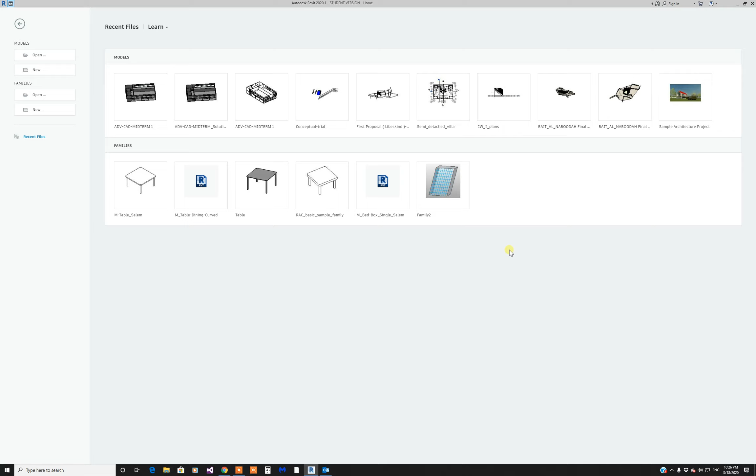Hello everybody, in this video I will create a very basic media storage as a family in Revit 2020.

So let's start. I'll go to File, create a new family, and I'm selecting the metric furniture, which comes with two reference plane presets.

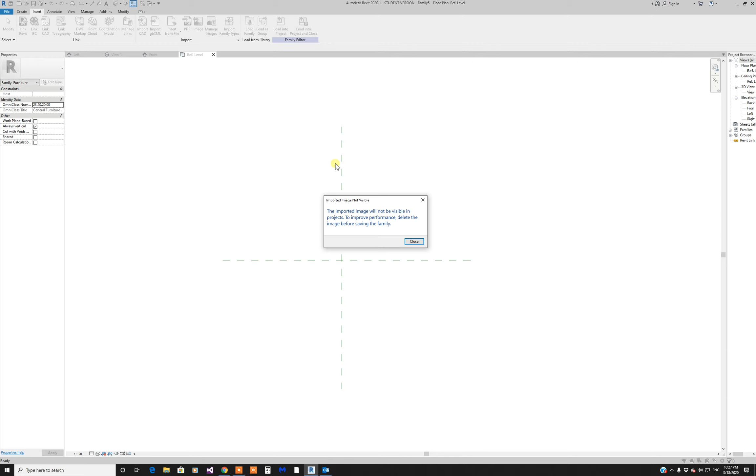I'm gonna bring a picture of my media storage that I'll use, something I just downloaded from the internet, and keep it here for dimensions so I know what they are. This is for the top dimension. I don't have all dimensions, so I'll estimate some of these.

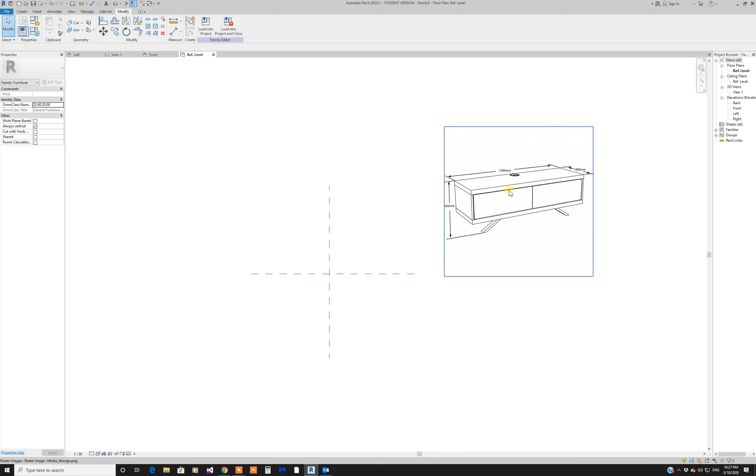Now I'll create the top reference plane, then go for the heights. I'll start my reference plane, first creating 400 milli, keeping the center—this is very important, this is the center of your family, so don't mess with this one. I'll offset this 200 milli.

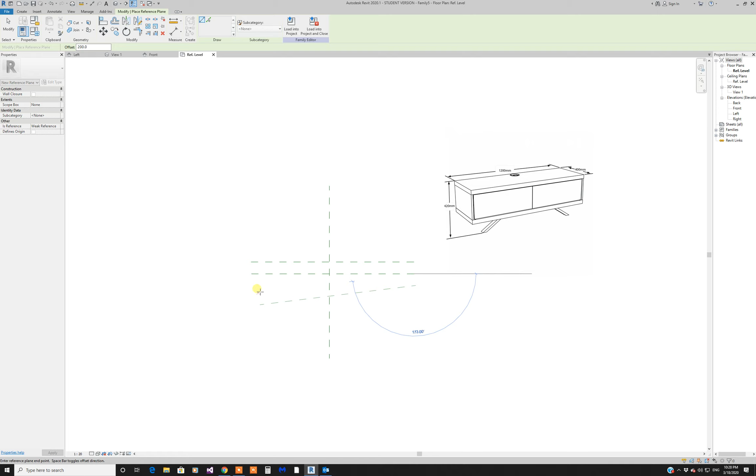I've set this one to 200, which gives me 400, and I'll create another offset of 600, and the other side 600. Now if I look at the dimensions, I have 1200 and 400, which are those two dimensions.

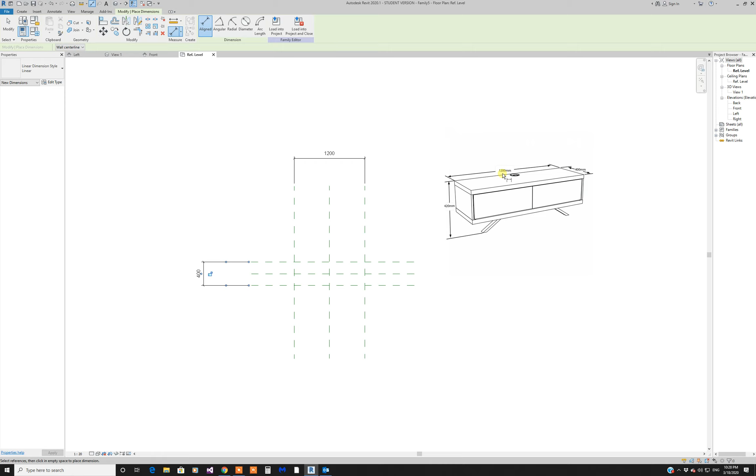Now before I do anything, let me fix the height. I'm gonna bring the same picture again, same image. It's a bit huge, so I'll reduce the size and bring it here just for reference.

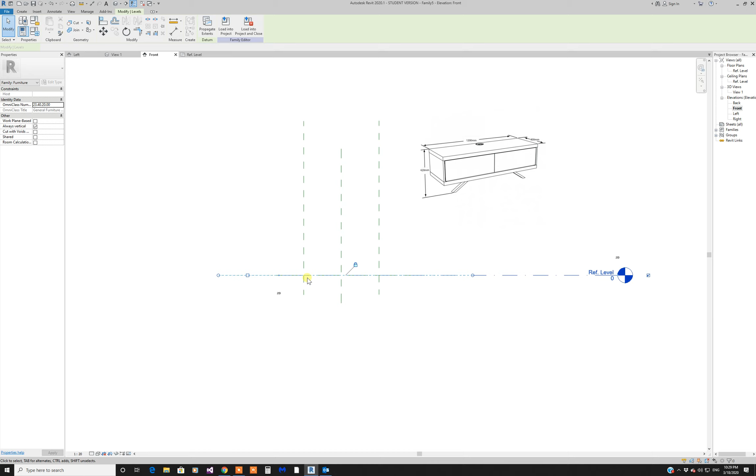Also, I'd like to move this level away so it doesn't get mixed up with the reference plane, since they sit on top of each other. So I'll move it here—much better. The height here overall is...

420 millimeters, so I'll create a reference plane to give me the highest point, with an offset of 420. So this is the highest I could go.

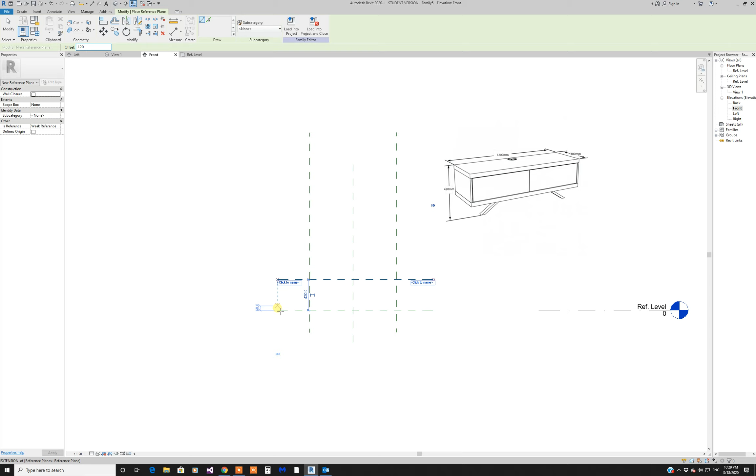Now I will estimate this about 120, so the height of the legs—I could name those, but I'll just leave it as is. I just want to make it as simple and easy as possible.

Okay, now let's start designing. I'll go to the top level and create the first top part through extrusion. I'll use the rectangle—it's already rectangle—and follow these reference planes. I'll estimate the height is about 50, so I'll say depth is minus 50 because I don't want to go above that 420 height.

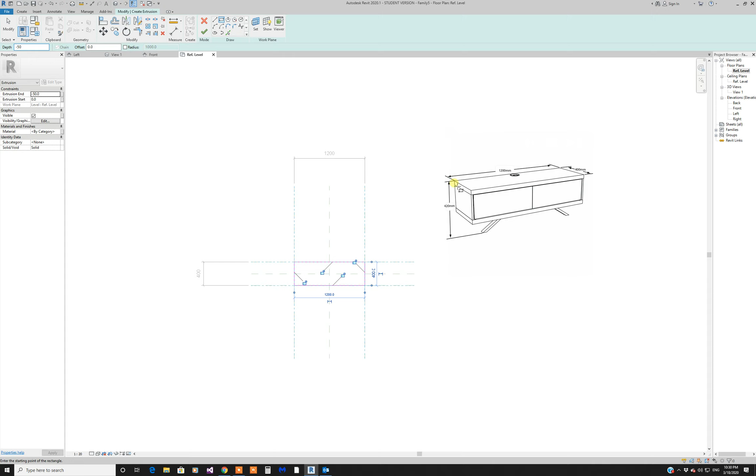I'll drop it down. I'm drafting here, so it should drop. I'm not really sure, I could be on the bottom, but it's okay as long as I drop it minus 50. Done. If I look at the front, yeah, I thought it's great here.

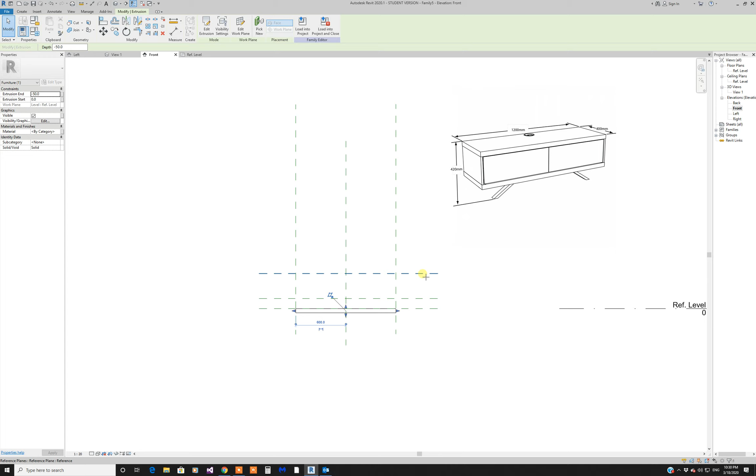So now I'm just gonna change the reference plane for the top one. Edit work plane, pick one. If I had given it a name, I could just pick it from here, but let me just pick it manually—I'll pick this one and come straight to this reference plane.

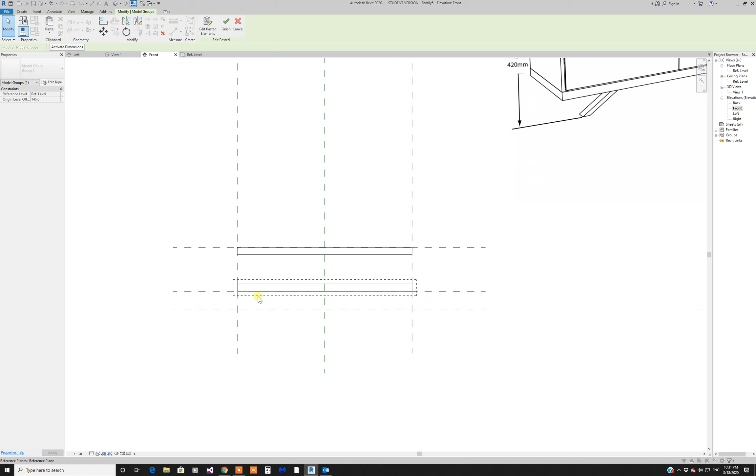Now I'll just copy this since I have this one, copy to the clipboard and paste it here. Now the thickness came higher, which is okay—this is actually what I want. I could bring it down, but this is good enough for me.

Now I'll go create the legs, about in the middle here. I'll go again to the front and create my legs. This time I'll use the sweep command to create my path. First I'm not selecting—I'm gonna sketch the path, about here. Just eyeball this thing, maybe here.

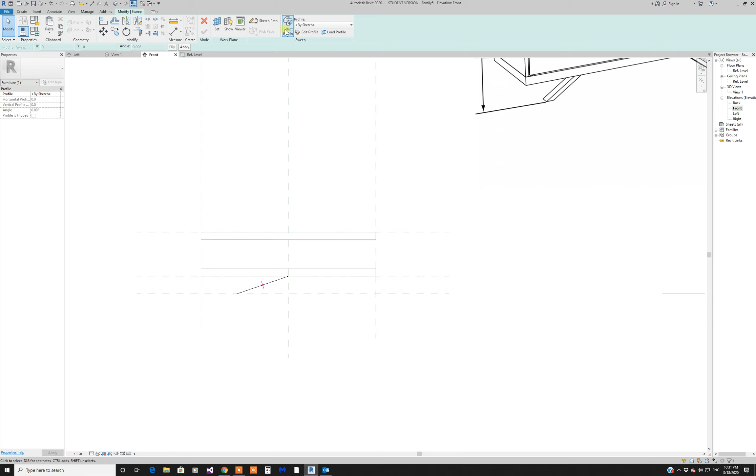Now the second thing asks for a profile. If you have a profile you could select it, but I'm just gonna create one—I'll go to the left to create a profile, a rectangle, about 50 as well, using this rectangular tool.

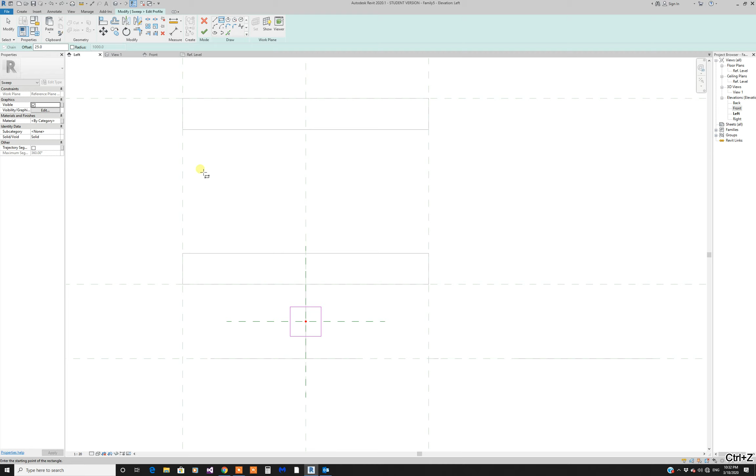It's a bit thick, so maybe I'll change this to 30 or 25, and this 25—but now it's not in the middle anymore. I'll just do it again, making it 25 all around. Okay, this may be okay.

Now the height—okay, no, not yet, I'm not finished, so let me extrude first and then we'll deal with it. Let me show you in 3D.

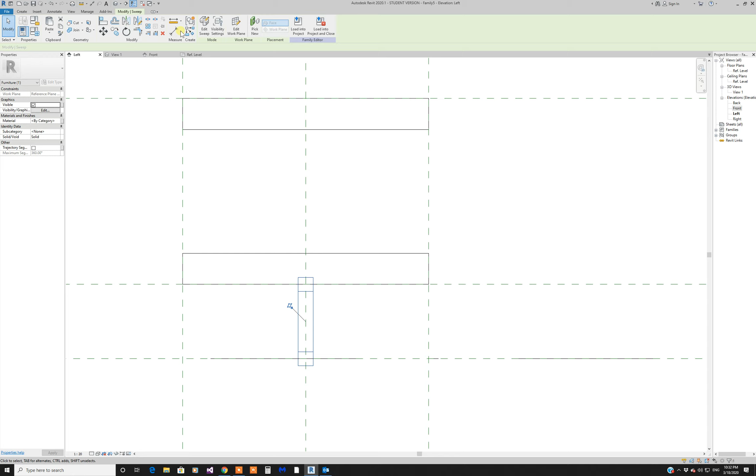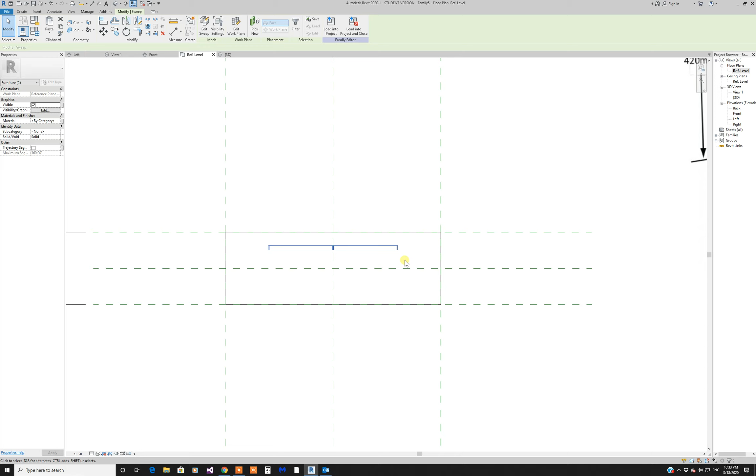One leg is created, but let me check the location—it's right in the middle. I need to create 4 of these, not 2, so I'll move this by some distance and mirror it according to this reference, then mirror those 2 along this reference. Now I have my legs created like that.

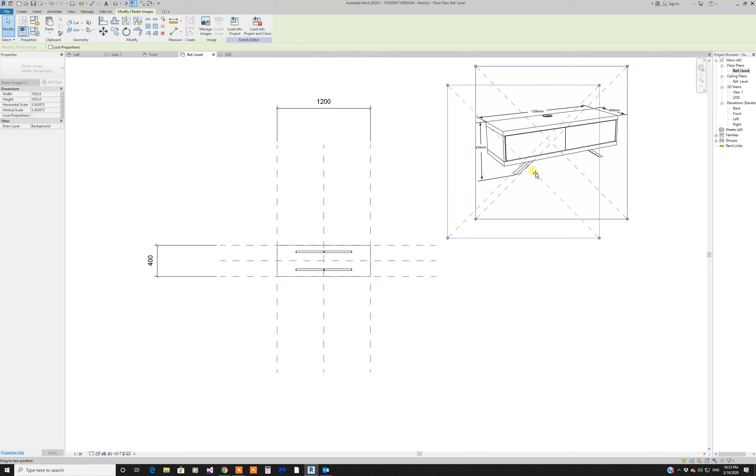Okay, so I'll make the sides—I have the side, what is that thing—so I'll make the side ones which are here, these side boards. Very easy, I'll use the extrude again.

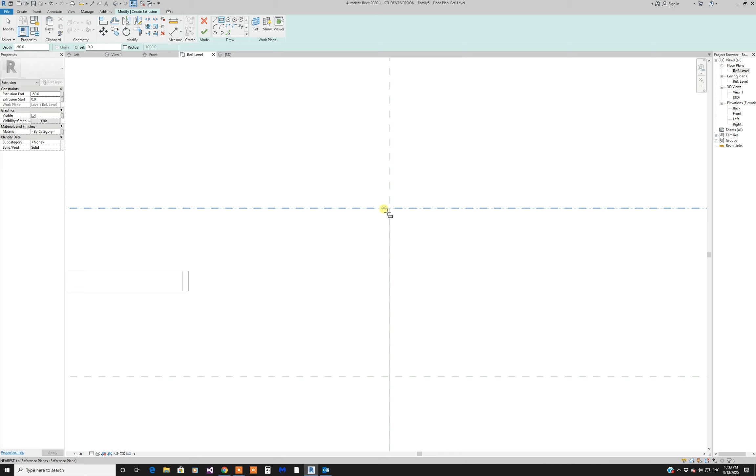Don't worry about getting the exact location and height because you could fix it later. I'll use a rectangular, track it a little bit here, just keep it far away, and it's about 18, about 20.

Okay, I've selected all, now I'll mirror this one along this reference. So I did not check the heights and everything, but it's very easy.

I'll go to the front. They are here now, so I'll just have to change the reference plane. Both are selected, so edit work plane, pick one, which is this one.

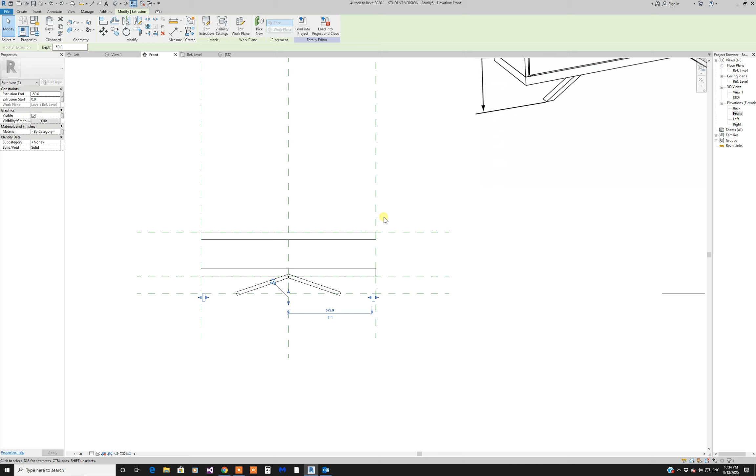Well, maybe I'll do something else—Control Z, and I'll select those and align. I'll use the align command, align those. Okay... no, it's not working for me, so I'm just gonna change the work plane, pick one.

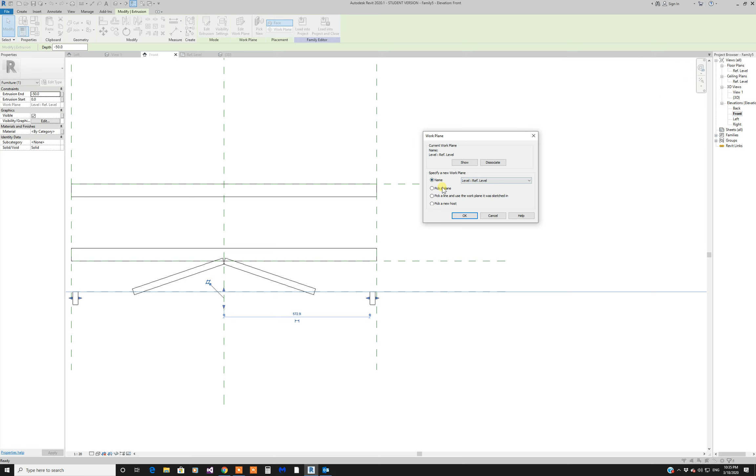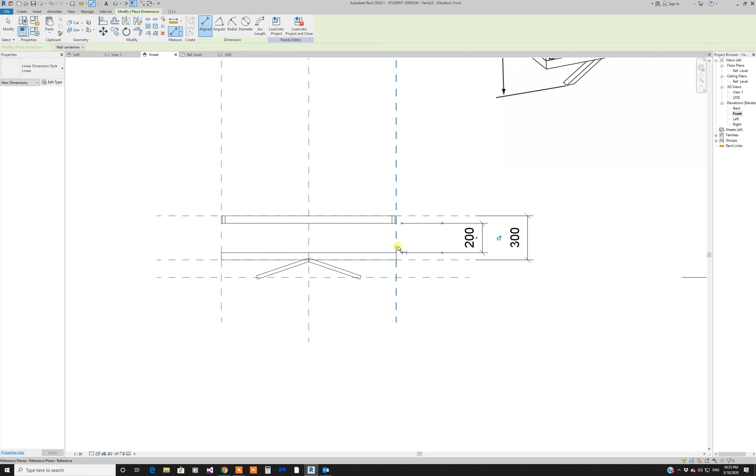Now they should not—the height should be 300, so the height will be 200. Instead of minus 50, I'll say minus 200. And can I say move now?

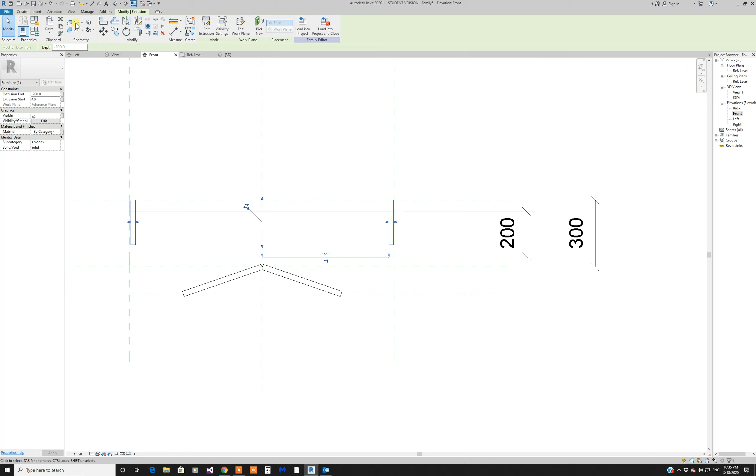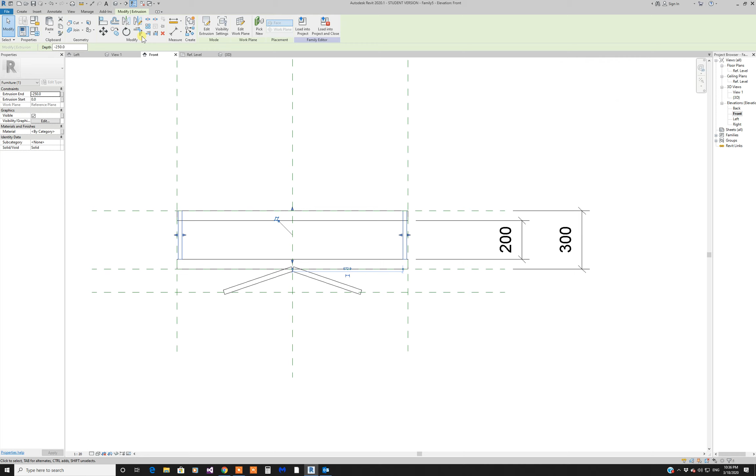Move from here to here. Still not working. Let me try align. But I'm still not happy with this. Let me try align again. Okay, this is better, I locked them here. Took me some time, but this is what I got now.

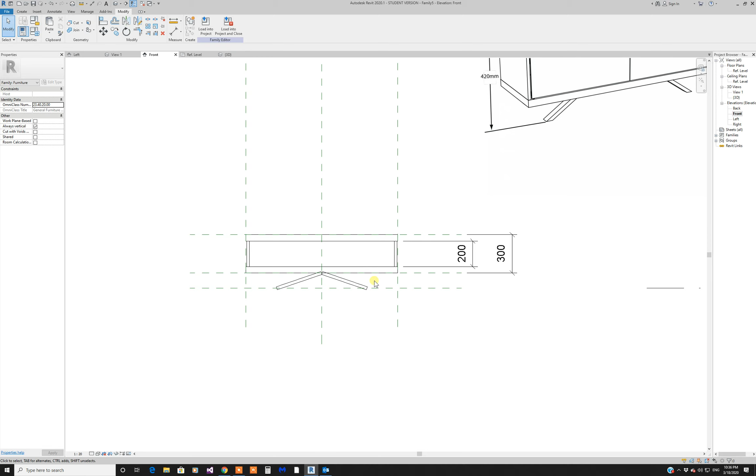Now I need to create one in the back. How does it look in the back? If I go to the front, the front is 2 pieces, the back is 1 piece. So I'm gonna go to the front, it's very easy.

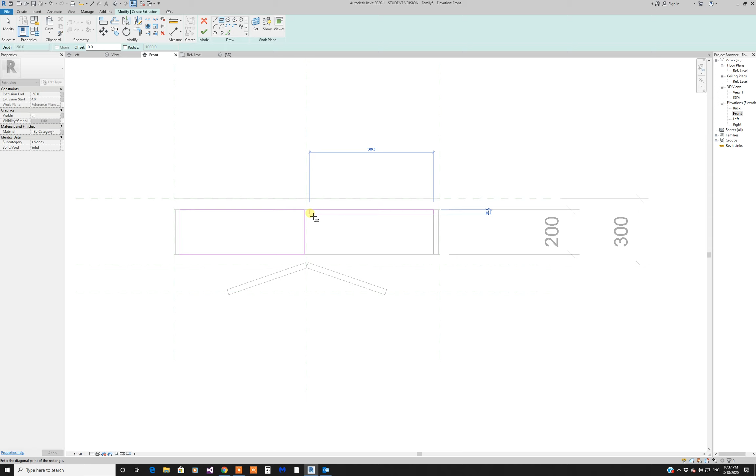I'll make an extrusion again, rectangular, and create one here. Just make a little bit and create another one. About here. There's a huge gap here.

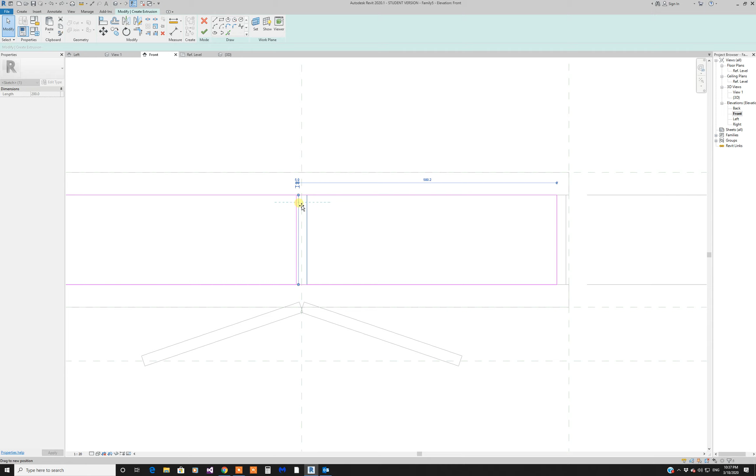If I reduce this to 12, or not 12, I'm just gonna move it a little bit. I want to make a little bit of gap between those, but not a huge one, just a little one, as you can see in the pictures.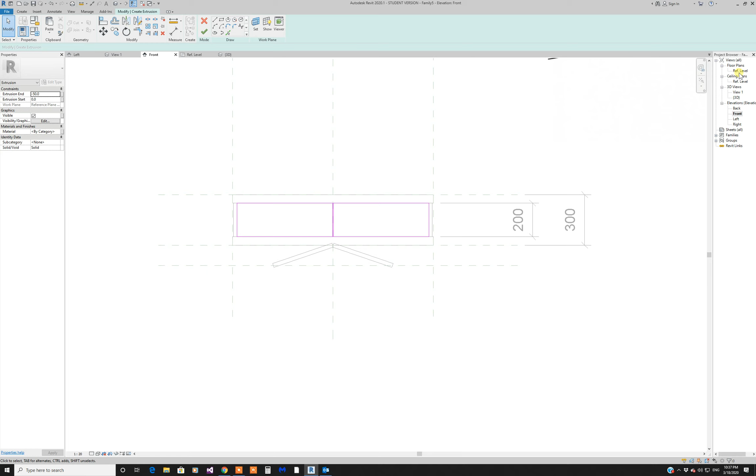Now the extrusion says -50, mine is coming from the center. If I look here, it's from here, so how much should the extrusion be? I'll make it -20. Okay, it's -20.

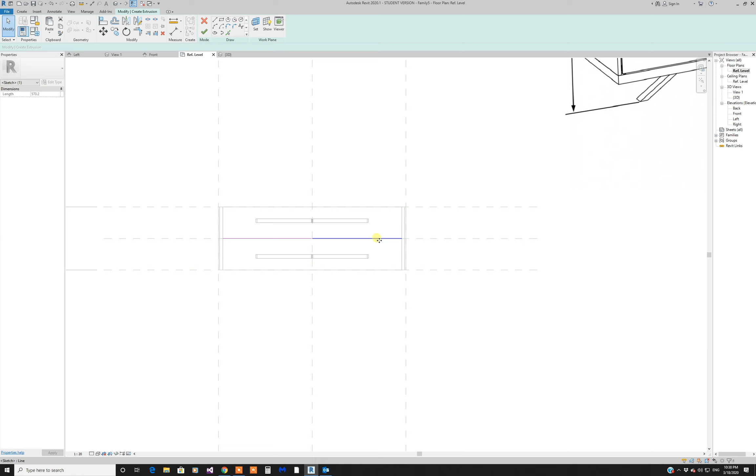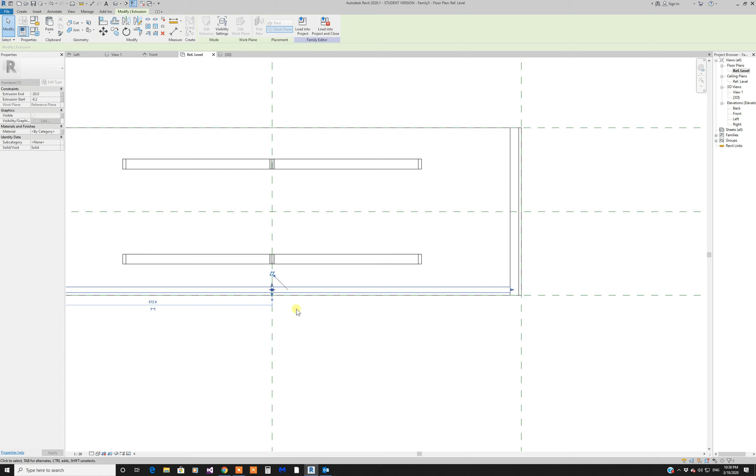Now I will change the work plane, pick new. Okay, now it's here. I could even just make it a little bit like this. And now in 3D, you see that.

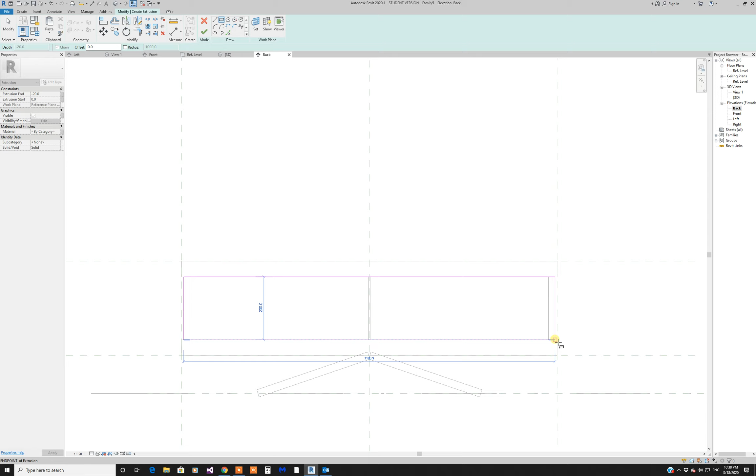The back one is the same, so I'm gonna go to the back. Front, back, and I'll just create one piece. Create extrusion, rectangular, and maybe I'll just cover the whole thing for the back, up to here. Align this line with this one, and the extrusion -20 is okay.

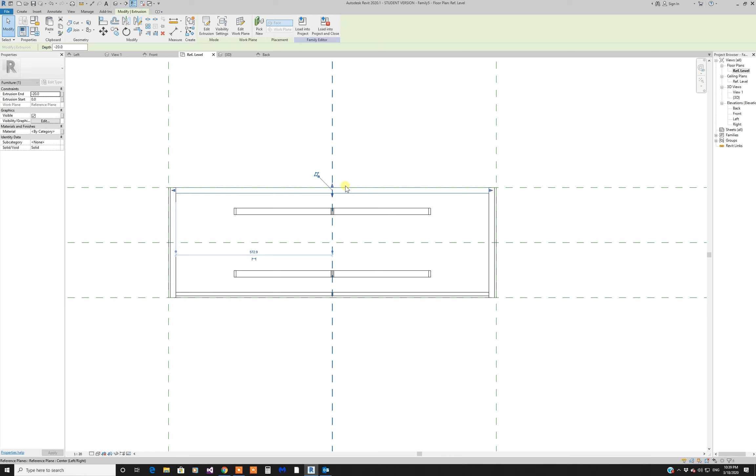So if I come here, I'll just prove it, and then change the reference plane. Edit work plane, pick, okay, and for me this is done. Okay, so this is done.

Now the next thing I want to do is add some materials. I'm gonna go to the parameters, family type, and add another parameter. This time I'll call it, make sure you select material type, and I'll say it's the main material, maybe box material, for the whole box. The next one I'll call the side material, and again I have to set the type as material. I'll add another one for the legs, legs material, and make sure you change the type to material.

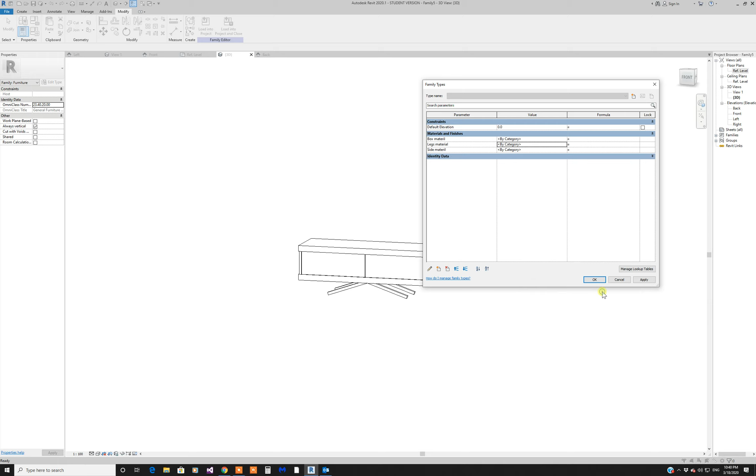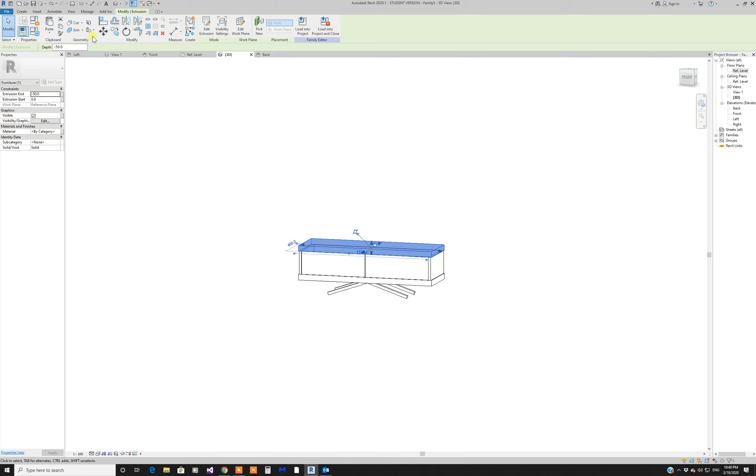Now you need to assign those materials, we cannot go without assignment. But let me link those, join them together. So I'm gonna join this, control this. Okay, so this may be used for one material, these are joined now, and I will join the legs as well so they become one material. So join.

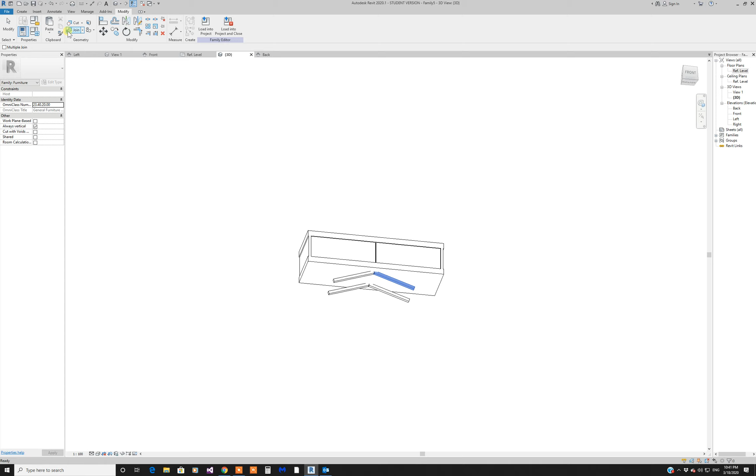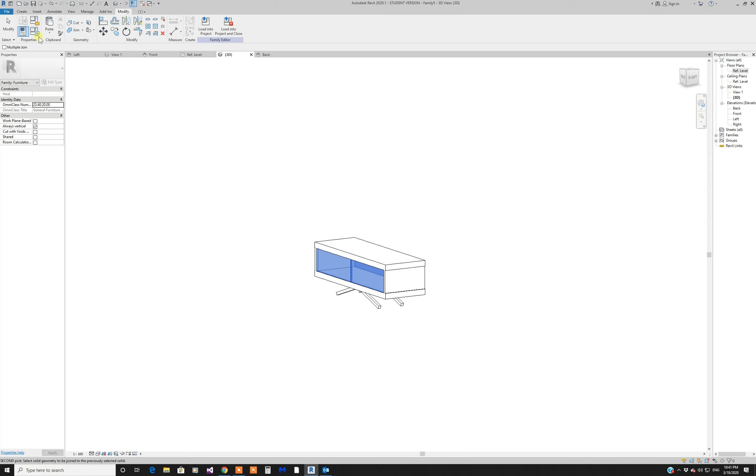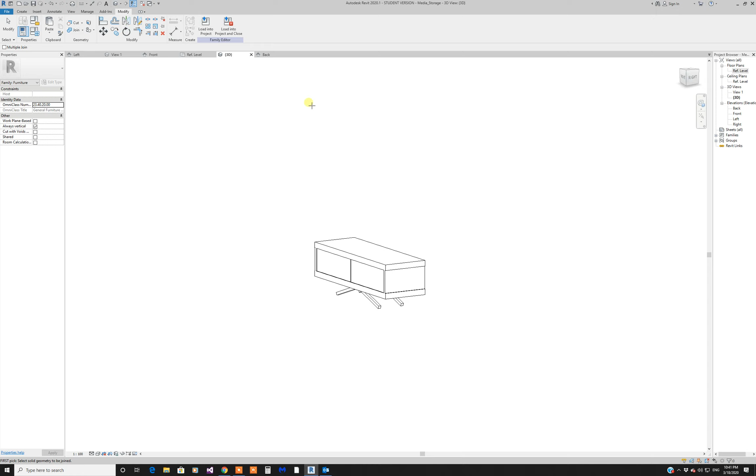2, 3, 4. Okay, so these become one, and the front, or I call it the side, I don't know why I said this, it's already joined. Join with this one, is it already selected? So now they're joined, they should have the same material. And I forgot something else, I'll have to save as family, and I'll call it media storage. Okay, my option, okay, save.

So once we created the material parameters, as I showed you, we have 3 different materials. Maybe I select different materials now or later, and use this birch for the box, and for the side, which is actually the front. These are the legs, so I'm just gonna use any black material, anything that has black.

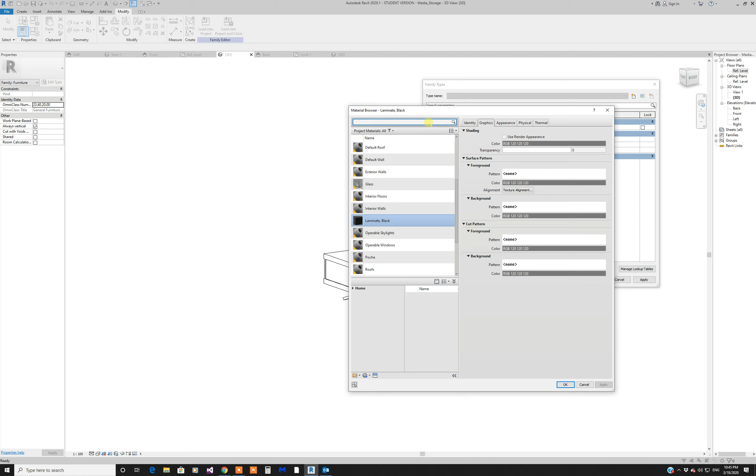Laminate, black. Okay, and for the side we do something white, ash. Okay, ash is good enough. But now this isn't gonna work until I start selecting, because these are groups, so I don't have to select both of them, I hope. And then do not select materials.

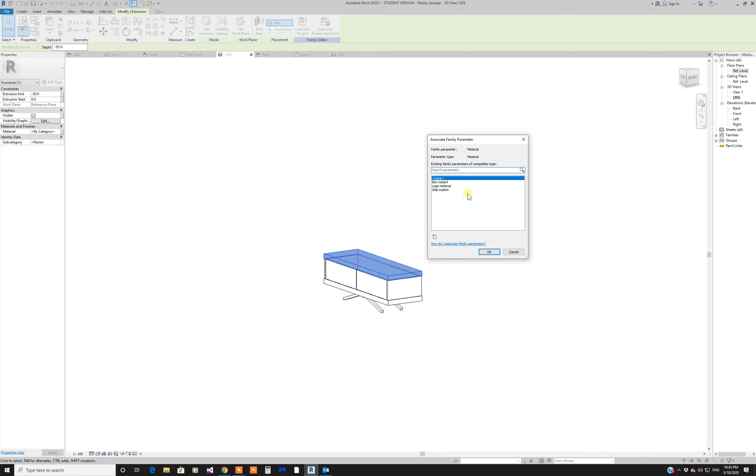I go to this Associate Family Parameter, and I associate this with the box. I think there's a misspelling here. Okay, and I select the legs and associate them with the legs material, and the side, which I really meant the front, I'm gonna associate with the side.

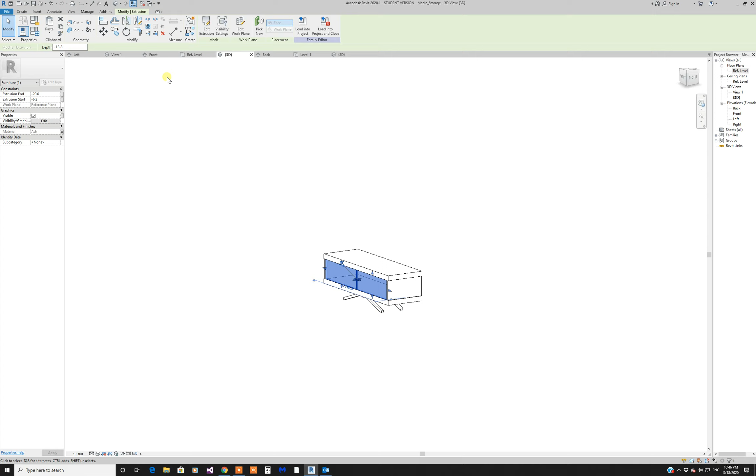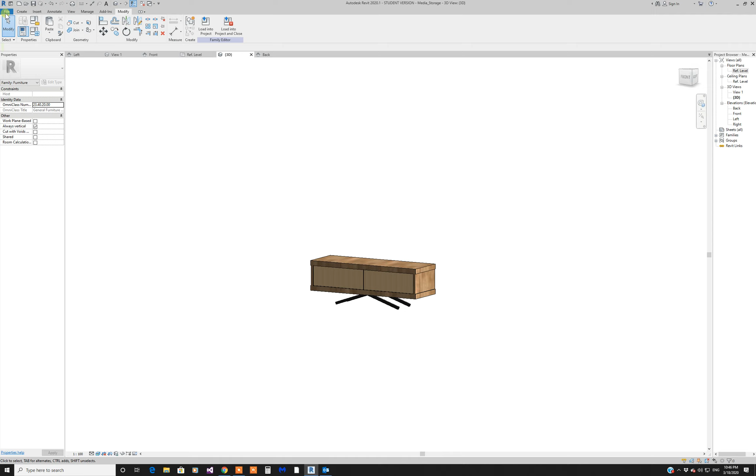Okay, now I need to open a new project. So now if I select it here, it says different materials have been applied. But that means when I go to the project, I could change any materials, not like I'm stuck with this material, I don't have to be. So I'm gonna open a new project, or if I have one open already, okay, and I will load my family into that open project, set it here.

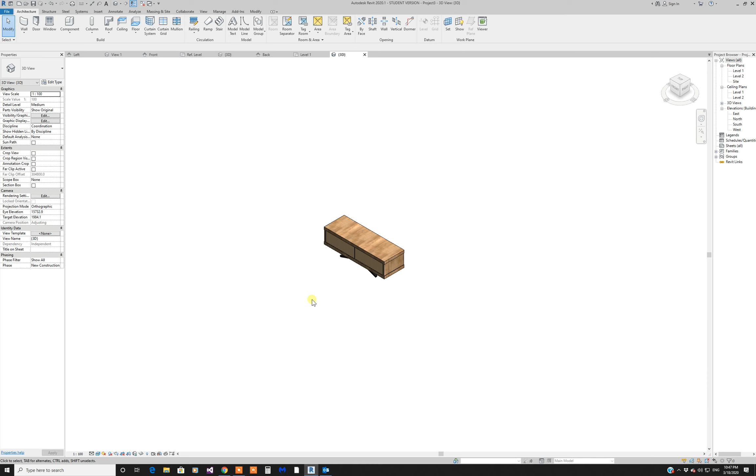As you can see, now it's in a project environment, and if I go to realistic, it has material, but I'm not confined to this one. I could change it anytime.

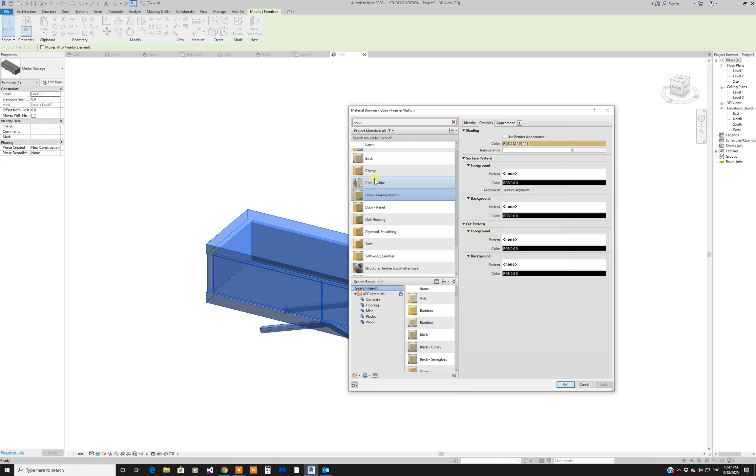So if I go to edit, I come here and change this material. Let's say another wood type. Let me look for another wood, and maybe see which one will look nice here. Wood, door panel, door frame, cherry. Yeah, maybe this is a bit different. Okay, so now I could change the material, I'm not set to this material.

So that's all I could say about basic family today. Thank you.